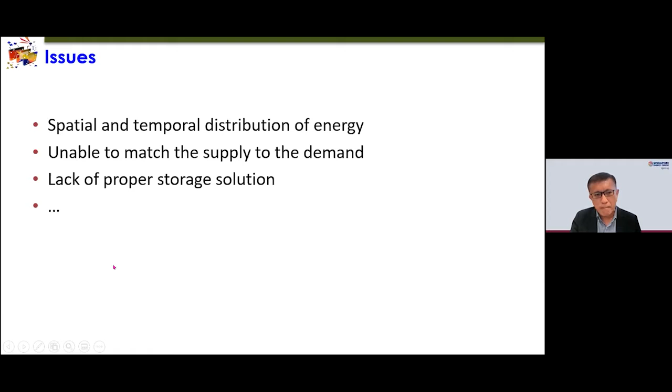Apart from this, there are many other things like financing. Certain poor countries are unable to have a power plant, even if they have oil. So we have financing issues, and also some political issues. There are many others.

Work can be mechanical work, but here we would like to focus on the electrical work, which is the electricity. Mass is easily understood. Coal, oil, and gas, these are the mass, right? So if we look at a township, a city, a town, if we draw a boundary around the township, right, the township is a system.

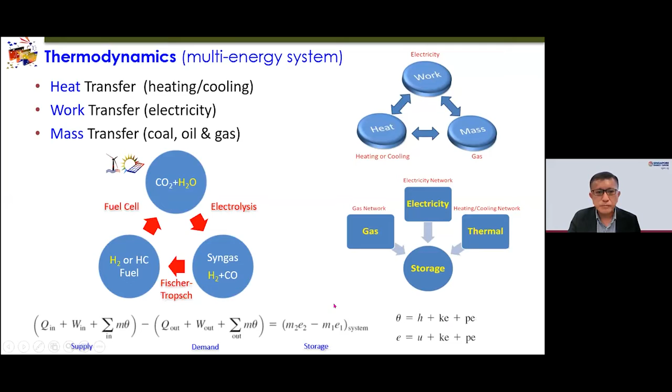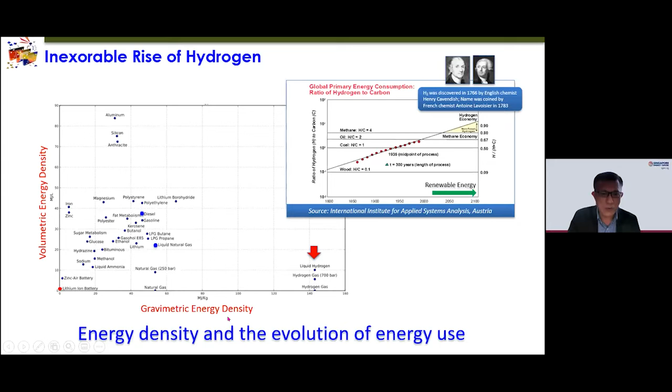But luckily, hydrogen can be compressed to increase its volumetric energy density. Liquid hydrogen is about 10 megajoules per liter. This is the highest among different types of energy in the gravimetric energy density sense. So ideally, we want to find types of energy or energy carriers that have high gravimetric and volumetric energy density.

So let's look at the demand. Energy density is particularly important for the off-the-grid application. A car requires 2 gigajoules of energy. A bus increases to 20 gigajoules. An A380, 11 terajoules. Space shuttle, 27 terajoules. And the big cruise ship is about 300 terajoules.

Now let's look at what energy we have. Hydrogen, as I just mentioned, we can compress at different pressures. The gravimetric energy density, based on the higher heating value, is very high; it's not an issue. The issue is with the volumetric energy density.

And look at liquid ammonia. The gravimetric energy density is not too bad, 22.5 megajoules per kilogram. And the volumetric energy density is actually higher than liquid hydrogen. So that is why there's a lot of interest in liquid ammonia for ship propulsion.

Syngas itself, if you compress it at 30 bar, has a very high gravimetric energy density but low volumetric energy density. Lithium-ion battery, if you look at both gravimetric and volumetric energy density, they are low. So we can see that batteries perhaps can be used in a car, at most a bus. When we move to other types of propulsion systems, we should rule out the battery for the time being.

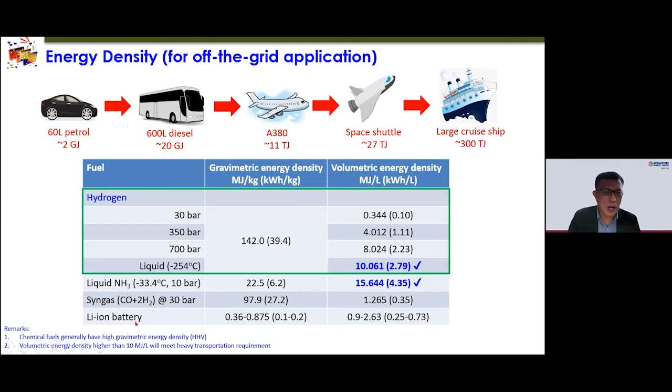And this is something people always ask me: is battery useful or is fuel cell useful? So today, I'd like to address this question by telling you what is a power-intensive application and what is an energy-intensive application. The y-axis is in terms of time. From 2 to 7 hours onward, we call it energy-intensive application. Below which we call it power-intensive application. And the x-axis is the power.

So if you look at the battery, it covers from small to big powers in terms of power-intensive application. We are talking about the 2 to 7 hours kind of range. When you talk about higher than 7 hours, days, weeks, even seasons, we have to look at different options. The most successful ones for high power and longer time applications are pumped hydro as well as compressed air energy storage systems.

And the hydrogen and oxygen storage system can actually cover this part, from low power to high power, from 2 to 7 hours onward, we can actually consider this. So this is the highlight of today's talk.

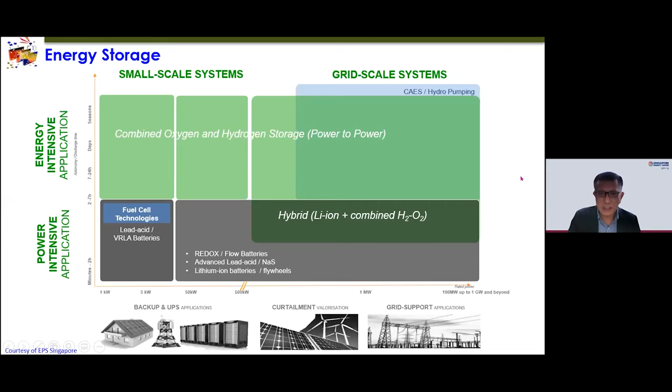Excuse me, I think I need the light. I stopped moving and the light is off.

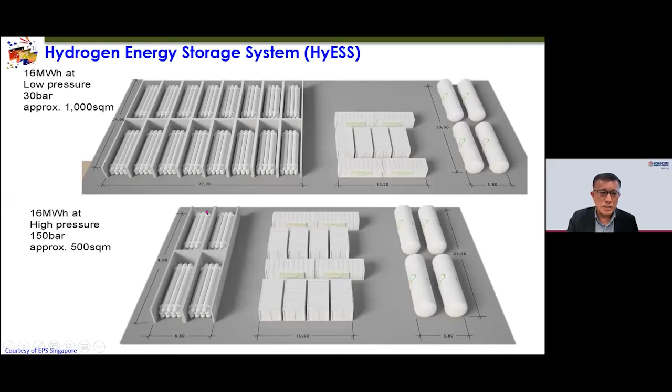So how big is this solar farm to allow a 10 megawatt solar PV installation and 16 megawatt hours of energy storage? This is 400 by 400, or 22.4 times a soccer field. So this gives you the dimension, the comparison.

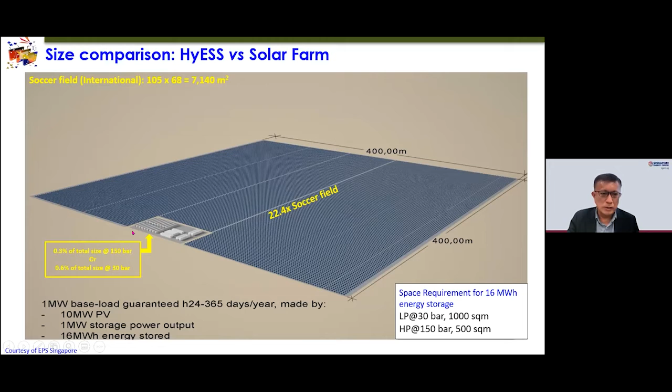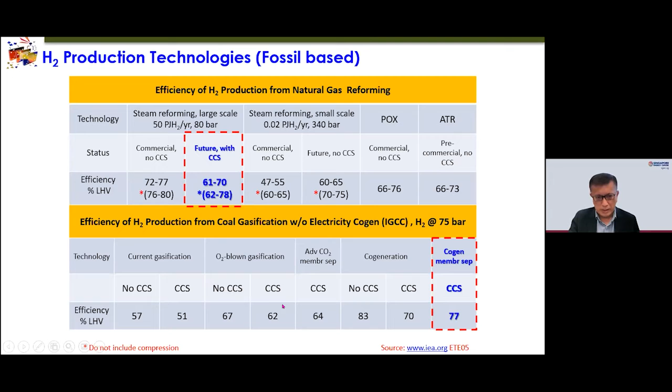In the future, if you use the oxygen together with the carbon and the water, then you would have a better kind of efficiency relative to the current gasification. The next will be

by electrolysis, right? Hydrogen production based on electrolysis. We have different technologies. This is a more mature one: alkaline, large-scale alkaline, high-pressure, advanced alkaline, PEM, and solid oxide electrolysis cell. This data was pulled from IEA, and PEM now is actually under commercialization, right? Their operating temperature, the amount of electricity required per kilogram of hydrogen produced, and the efficiency based on the lower heating values.

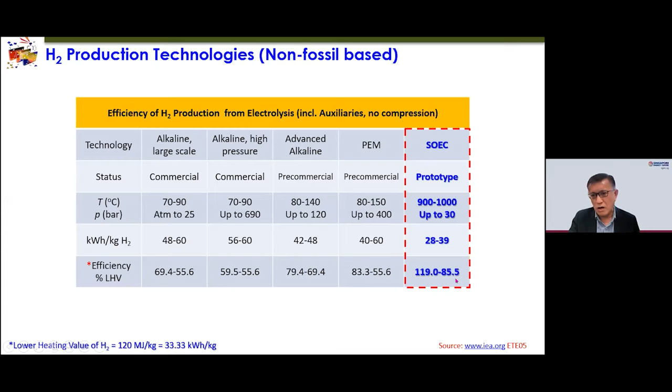Compared with alkaline electrolysis cells and PEM, the solid oxide electrolysis cell actually has the best efficiency, from 85.5%, which is higher than PEM, to more than 100%, right? So you may question why the efficiency can be more than 100%. I have to highlight that this is the electricity to enthalpy of hydrogen conversion efficiency. And I will tell you why the efficiency can be very high.

Another type of hydrogen production technology is the catalytic decomposition of methane. Because this is neither blue nor green, a new term is called turquoise hydrogen, because when hydrogen is extracted from methane, it will not produce any CO2. Instead, solid carbon is produced, right? So we propose using rotary reactors, feeding the gas, and then under pyrolysis we will generate the hydrogen and the carbon. I do not want to go into the details, but this is a new way and other method for hydrogen production without CO2 generation.

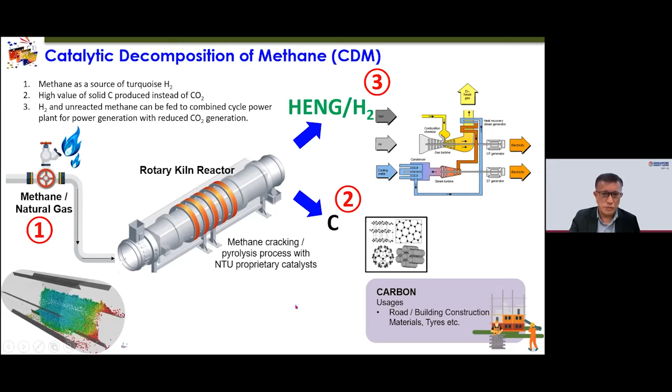So this slide gives a summary of the different hydrogen pathways. It can be thermolysis using heat, electrolysis using electrons, photolysis using photons, and hydrolysis, for example, a chemical hydride reacting with water to generate hydrogen.

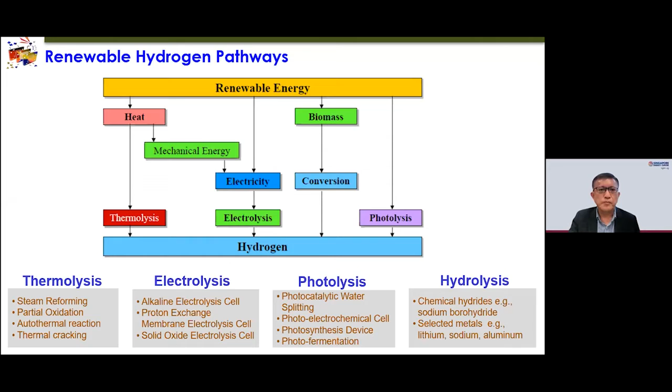So why high temperature electrolysis? Today's focus will be very much on high temperature electrolysis, right? This will also explain why the conversion efficiency in electrolysis, as I mentioned, can be more than 100%. If you look at the heat engine, we provide the fuel, which is the source of heat, and generate mechanical work in a car engine, and you have a heat sink that discharges to the atmosphere. The efficiency is smaller than 1. The fuel cell actually works similar to the heat engine, right? You draw in the fuel, produce electrical work, and then you have a heat sink. So the efficiency is less than 1.

But electrolysis actually works similar to a heat pump, right? Instead of putting in the fuel source, we put in electrical work, and then heat is mobilized from the source to the sink. So instead of efficiency, we use a term called COP, coefficient of performance, which can be greater than 1. It can be 3, can be 4, in the heat pump context. The electrolyzer works on the same principle as the heat pump. We put in electrical work, and we can mobilize heat from the surroundings. So the combination of the work, which is our input, plus the heat from the surroundings is equal to the energy sink. That's the reason why the efficiency can be more than 100%, right?

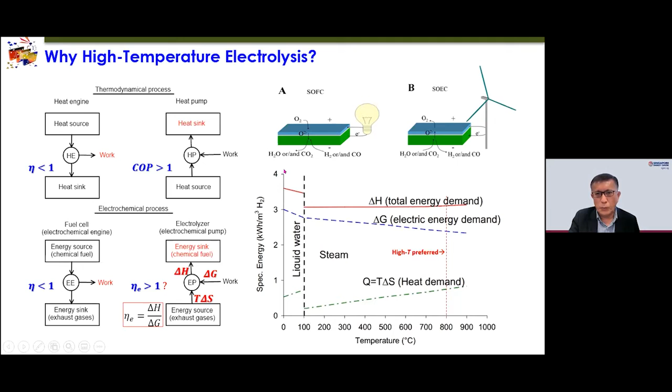And interestingly, if you look at the temperature, when we operate at a high temperature, the electrical work demand is reduced, and the heat from the surroundings is increased. And this is the output. When the temperature increases, the gap becomes bigger. So the efficiency from electricity to enthalpy actually increases when the temperature is increased. This explains why we want to operate at a high temperature. But of course, the electricity ideally comes from renewable energy, either wind or solar energy.

So we can electrolyze water to produce hydrogen, or electrolyze CO2 to produce carbon monoxide. Of course, we can co-electrolyze the two to produce hydrogen and carbon monoxide, which is syngas, right? So let's look now at flue gas electrolysis, especially the flue gas from an oxy-combustion plant. The flue gas is nothing more than CO2, water, oxygen, and sulfur from the fuel, without nitrogen, because it's from an oxy-combustion plant.

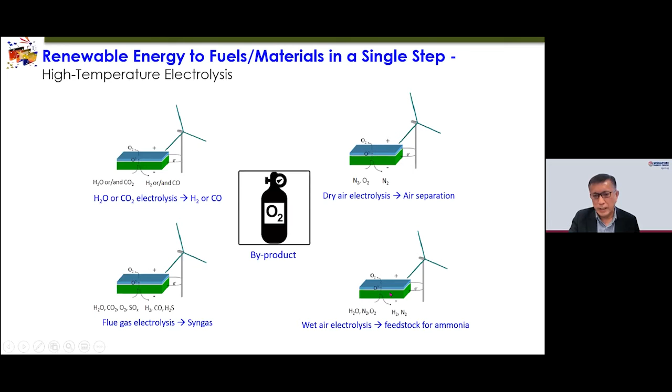And once it is electrolyzed, you will produce a syngas, and the sulfur will become hydrogen sulfide, which can be removed later, right? So electrolysis can also apply to air. We can actually separate the nitrogen from the oxygen by using electrolysis, and this serves as an air separation, right? And wet air electrolysis: wet air consists of nitrogen and oxygen plus water. When we electrolyze it, it becomes the feedstock for ammonia, right? And in all these methods, the byproduct is actually oxygen, right?

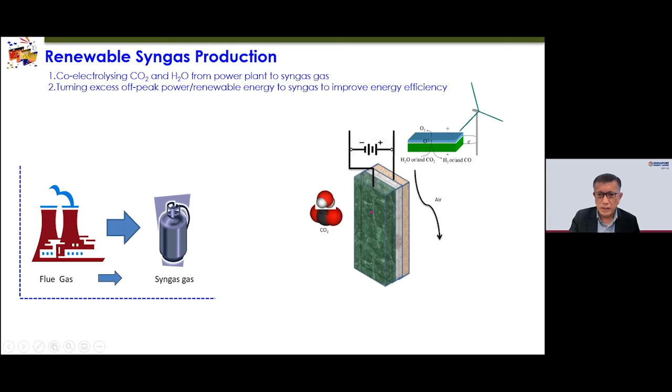Now, this is a typical case to produce a syngas. I have one animation, right? Going through the electrolysis, the flue gas containing CO2 and H2O will ultimately become a synthetic gas, and the byproduct is oxygen, right? So this is a single step, right? By injecting the electrons, you generate the syngas.

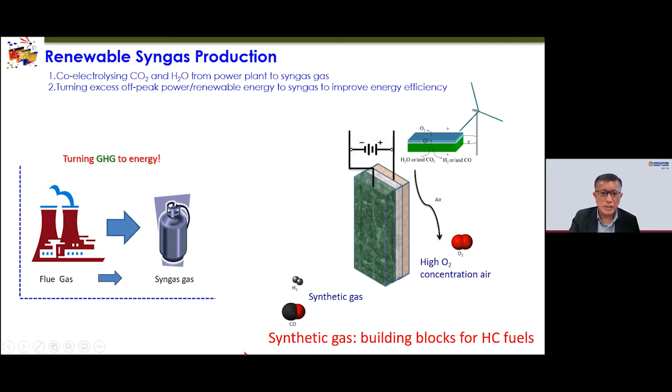So this is a typical oxy-combustion plant, right? Essentially, you have two systems. One is the oxy-combustion power plant, and the other one is the solid oxide electrolysis cell. So the flue gas from the oxy-combustion plant contains rich CO2 and H2O, and also the waste heat, right? Once the gas is electrolyzed, it will produce the syngas, and we can use the excess energy from the power plant or from renewable energy.

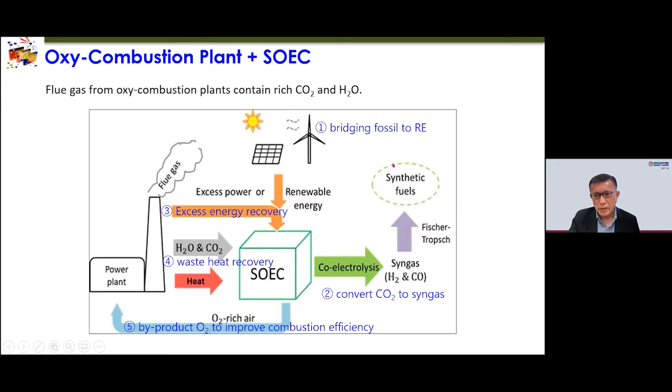So essentially, we bridge the fossil energy to the renewable energy, right? This is using the fossil energy, and this is the renewable energy. We bridge the two in an energy transition era. And interestingly, the oxygen, which is the byproduct from the electrolysis cell, can be channeled back to the power plant. The power plant requires a lot of oxygen, so this oxygen can be used in the power plant. And the syngas produced by electrolysis can further convert to synthetic fuel through a Fischer-Tropsch kind of process.

Now let's look at the numbers, right? You have a power plant and you have an electrolyzer. Assuming we burn methane gas, we require 2 moles of oxygen to generate 1 mole of CO2 and 2 moles of water. And once we use renewable energy to electrolyze it, we produce 1 mole of CO and 2 moles of hydrogen as a syngas. And the byproduct is 1.5 moles of oxygen. We can feed it back to the power plant.

So look, we require 2 moles and we are short 0.5 mole. 0.5 moles of oxygen can be obtained from the air through dry air electrolysis, which I just showed, again using renewable energy. And we can form this closed loop, right? And look at the heating values of the syngas per unit mass of methane burned, right?

Methane produces 1 mole of CO and 2 moles of hydrogen, right? So 16 kilograms of methane produce 28 kilograms of CO and 4 kilograms of hydrogen. And we put it on a per kilogram basis. This is the heating values of methane, carbon monoxide, and hydrogen. Considering the heating values, 50 megajoules of methane, which is 1 kilogram of methane, produce 47.5 megajoules of syngas. And this energy is actually taken from renewable energy. So we form a closed loop, carbon neutral. The carbon is reused and routed back to the power plant.

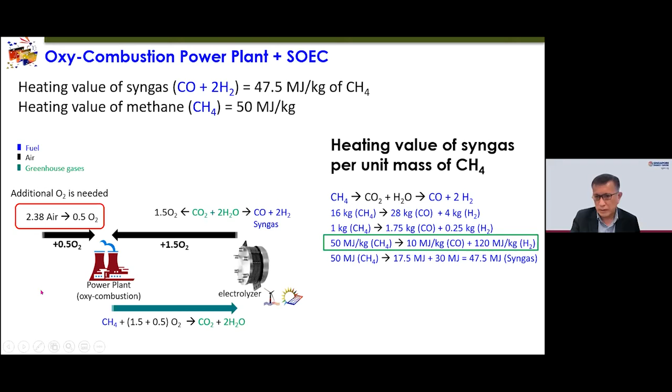So now I'd like to show you some more technical stuff. This is a test facility that we have. We are using a cell. The electrolyte is yttria-stabilized zirconia, and this is the anode, and this is the cathode, LSCF, right? And this is forming a stack, this is a test station, and this is the cell mounted inside the furnace.

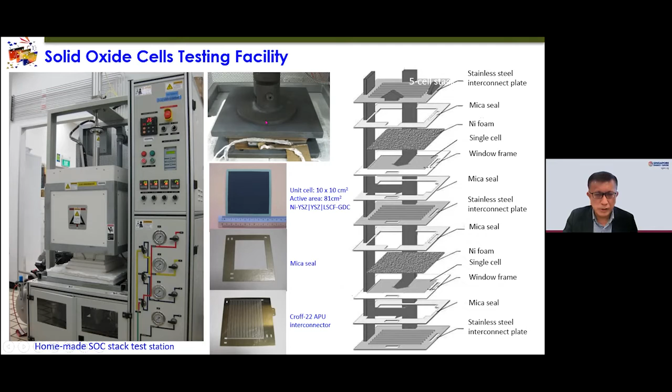So let's look at the electrolysis, right? The SOC, or solid oxide cell, is the only technology that can run in fuel cell mode and electrolysis mode reversibly, using a single device. Unlike other technologies, like PEM fuel cells and PEM electrolysis cells, which are totally different devices. But the solid oxide cell allows you to run in different modes, and it can produce either electricity when you operate in fuel cell mode, or hydrogen when you operate in electrolysis mode. And the hydrogen can serve as energy storage, right?

So you can see that we are actually running from electrolysis mode to fuel cell mode. You can see that the curve is very smooth. And at this line, zero current density, this is the open circuit voltage, right? When you operate the cell, either in fuel cell mode or electrolysis mode, if you are close to the open circuit voltage, the efficiency is the highest, right?

Now, in this case, we are running at 3 different atmospheres. The green color one is 3% of water. Water is actually the feedstock for the electrolysis, whereas the hydrogen is the feedstock to the fuel cell, right? So you can see that the green color is favorable to the hydrogen fuel cell, but it's no good for the electrolysis because the concentration is very low.

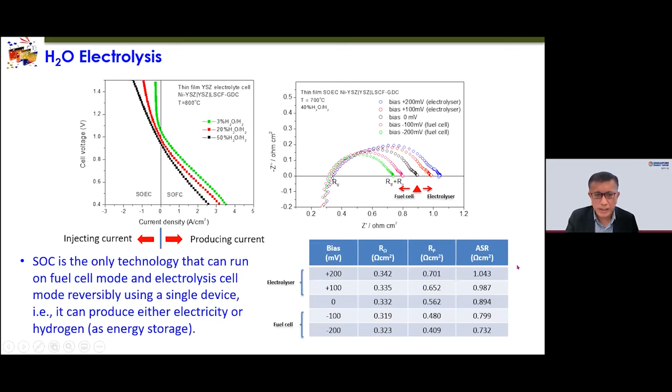So let's look at this slide, showing the different atmospheres again. And I would like to share with you, looking at the 2 important parameters. One is the current density at 1 amp per square centimeter. Current density, the highest, meaning the highest the yield, right? So what we want is to achieve a reasonably good current density at low voltage. Just like I mentioned, the lower the voltage, the higher the efficiency will be, right?

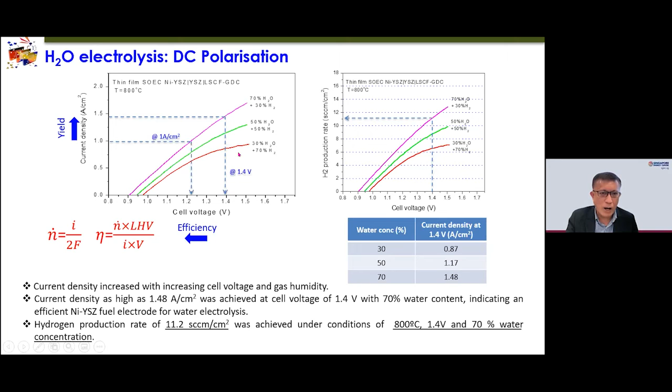Another criterion is, if we compromise with the efficiency, say at 1.4 volt, what will be the so-called yield, the current density, which is related to the hydrogen production rate. We all know that 1 amp is equivalent to 7.6 cc per minute of hydrogen generation. And we can easily calculate from the current the hydrogen production rate, right? From the current divided by 2F, you will get the molar rate, multiplied by the heating value, divided by the power, then you can get the efficiency.

CO2 electrolysis, right? Similar trends in the DC polarization as the water electrolysis. The electrolysis current increases with the CO2 concentration because this is the so-called feedstock, right? And the higher the temperature, the higher the current density will be. So higher temperature will be favorable to the yield from CO2 to generate carbon monoxide. So a typical limiting current density behavior was observed at high voltage. At high voltage, you can see that especially the lower concentration of the feedstock will reach the limiting current.

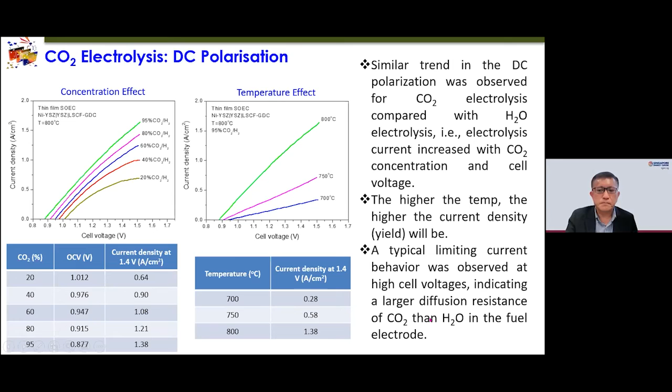Now let's compare the water and the CO2, coming to an end. Bear with me. So we have different types of electrolysis behavior, i.e. water electrolysis, CO2 electrolysis, and co-electrolysis, which is the case of CO2 and hydrogen, because the CO2 and hydrogen will first go through the water gas shift reaction to generate water, with the remaining CO2, and then the electrolysis is simply the case of co-electrolysis, right?

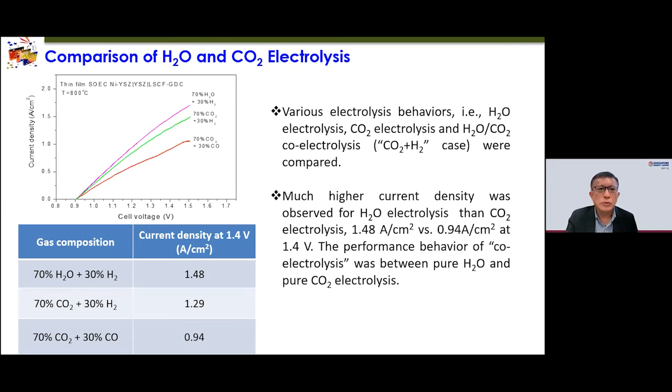Much higher current density was observed for the water electrolysis than the CO2. You can see that, right? So this actually tells you that water is easier to be electrolyzed compared to CO2. And this is the co-electrolysis, right? Remember just now we mentioned that in an oxy-combustion power plant using methane, we will produce 1 mole of CO2 and 2 moles of water in the flue gas, right? Now we have 3 cases.

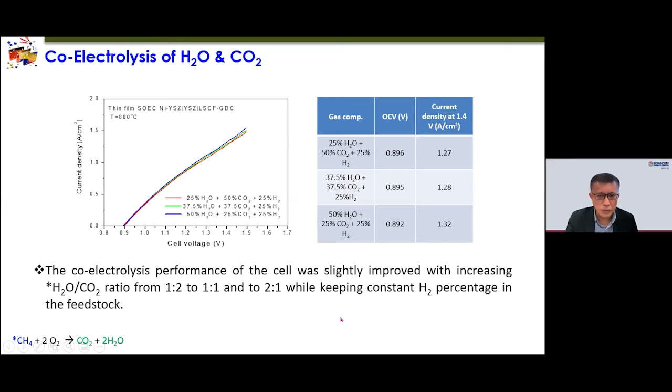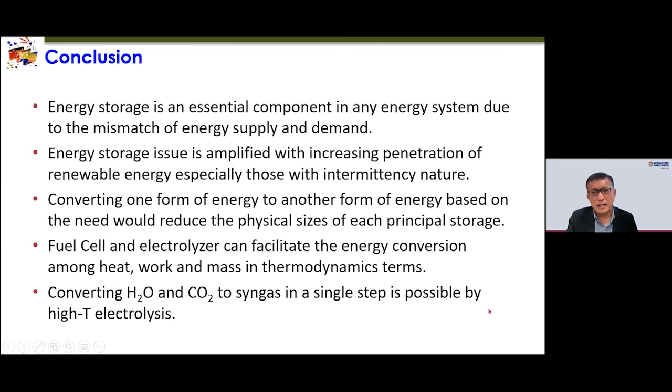Thank you, Prof. Chan, for giving us the wonderful talk. Okay. Thanks, Prof. Chan, for giving us a wonderful talk, which has given us a big picture about the energy system, as well as some knowledge about how hydrogen and the fuel cell technologies can bridge the gap towards a sustainable future. So right now we have Q&A session.

The participants, you can type your questions in the Q&A, the chat box, and I will read out the questions for you. So while we are waiting for the questions from the participants, I can start maybe asking one or two questions. So Prof. Chan, could you share with us what are the major challenges in this SOEC technology right now? What we need to solve?